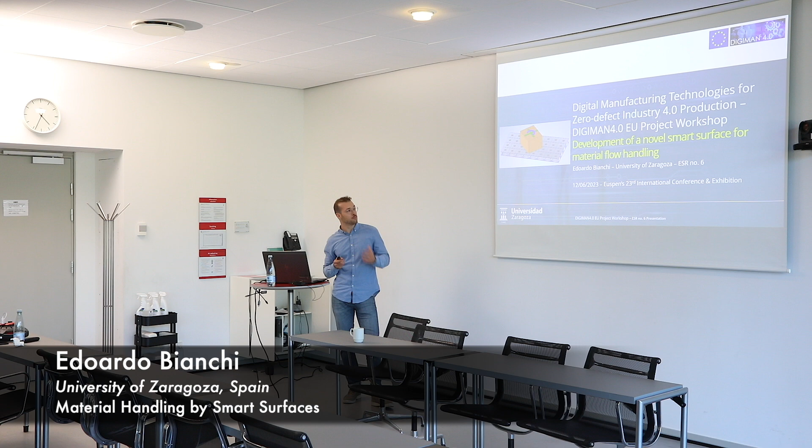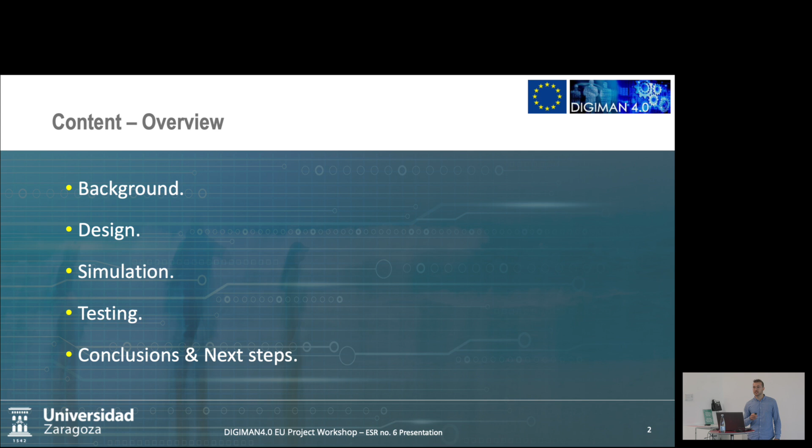Good afternoon, everyone. So, as Guido mentioned, the title of my work within the DIGIMAN project is the development of a novel smart surface for material flow handling. Today we are going to see the background introduction, the design, the simulation and the testing parts, and finally conclusion and next steps of the work.

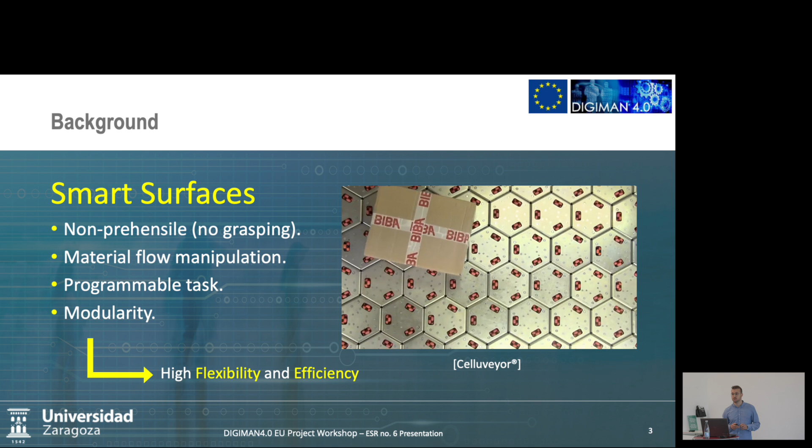Just a few words on what are smart surfaces. These are a kind of non-prehensile transport system used to manipulate and handle material flows inside factories and warehouses. And the main characteristics are that they are programmable and modular. And these two characteristics make them more flexible and efficient compared to classic systems such as conveyor belts or vibratory feeders. There are a lot of technologies that can be used to create these kinds of surfaces.

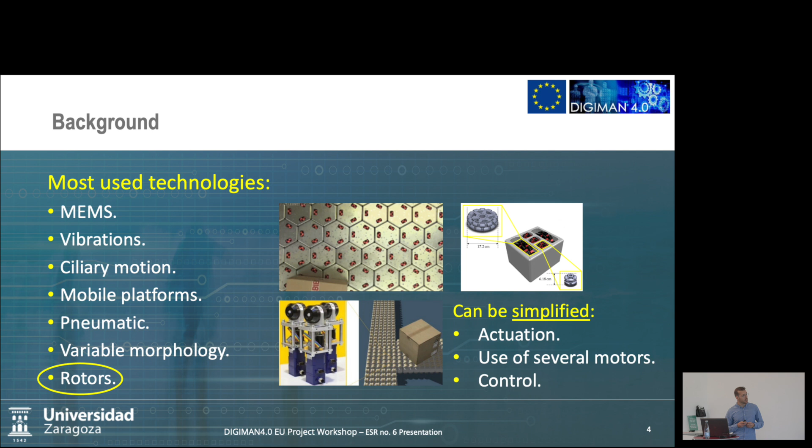I focus mainly on the last one of this list, so the surfaces with the rotors. And I noticed that this kind of system usually takes advantage of a lot of motors. So they exploit a lot of motors in each module, making really complex the actuation and the control. So I decided to work on the simplification of this fact, and I try to create a new surface without the use of motors.

So this is the concept of the surface. It's modular, like the previous system that I mentioned, but exploits idle rotors. So they are not actively driving the object on top of the surface, but I can control only the orientation of their axis of rotation. So the rotor doesn't have a motor inside, so it's not spinning, but I can control only its orientation. And this orientation can be placed only in a discrete number of positions.

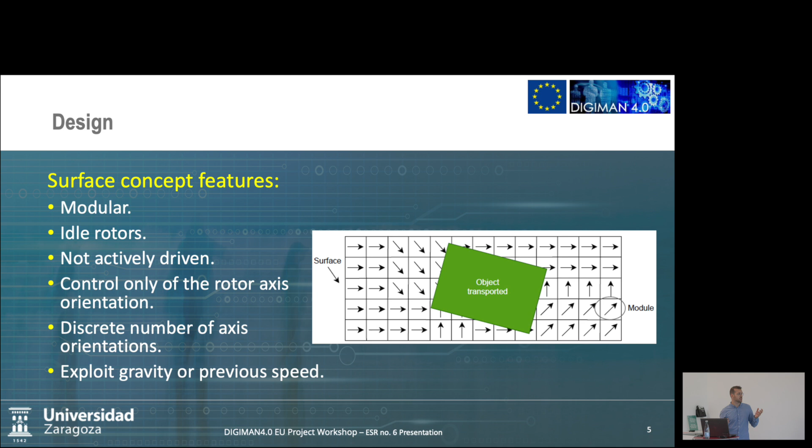So to compensate the missing actuation, since it uses idle rotors, I'm planning to use gravity, inclining the surface, or previous speed of the object. For example, in a transport line, you can imagine that there is a conveyor belt before the surface.

Focusing on the single module, the idea is to use a spherical rotor, which is supported from below to be free to rotate in every direction, and is surrounded by pins that I use to define the axis of rotation. So the idea is, when I want to define the axis of rotation, is to select a pair of opposite pins and put them in contact with the sphere. And this contact defines the axis of rotation. When I want to remove this axis and select a new one, I detach these pins and I connect a new pair.

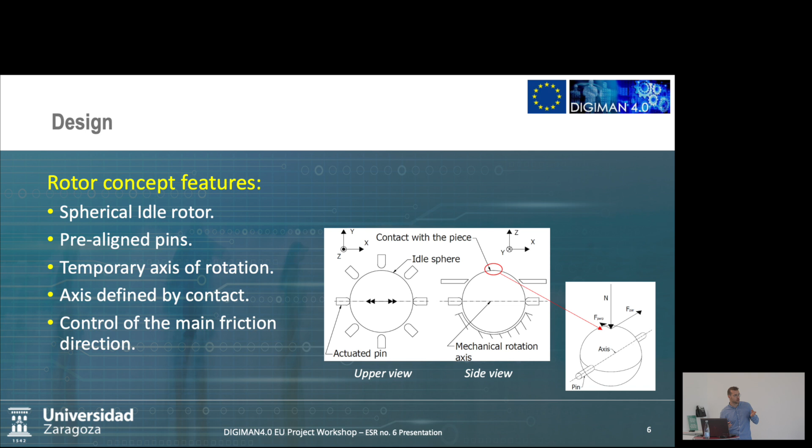And as you can imagine, when I have a rotor and its axis of rotation, there are two main forces between the rotor and an object that is moving on top of it in the contact plane. There is a force parallel to the rotor axis, which is the highest one because the rotor cannot rotate in this direction. And there is a smaller one, which is perpendicular to the rotor axis, because it's due only to the resistance against rotation of the rotor. And I'm planning to use these two in order to manipulate the material flow.

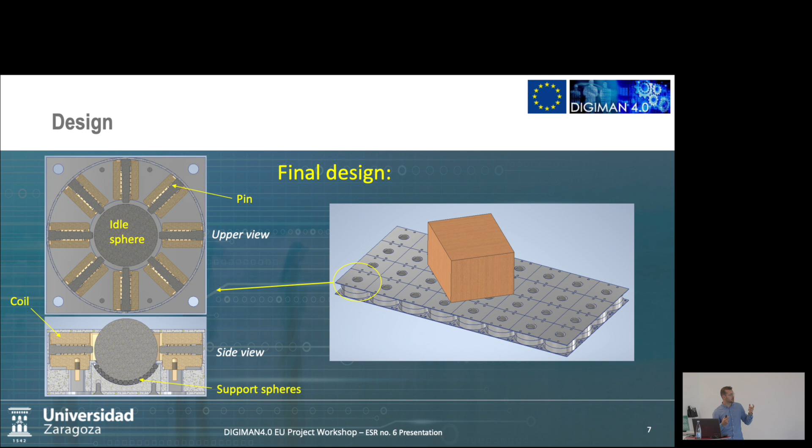This is the design which I came up with to do this task. So here you can see some sections of the concept of the module. So you can see the idle sphere in the center, supported by smaller spheres, and the pins surrounding the sphere, and the actuation system is done with coils. So the idea is to select a pair of opposite coils, turn them on, they magnetize the pins inside, and this magnetization produces the attraction towards the central sphere and the contact for the axis definition.

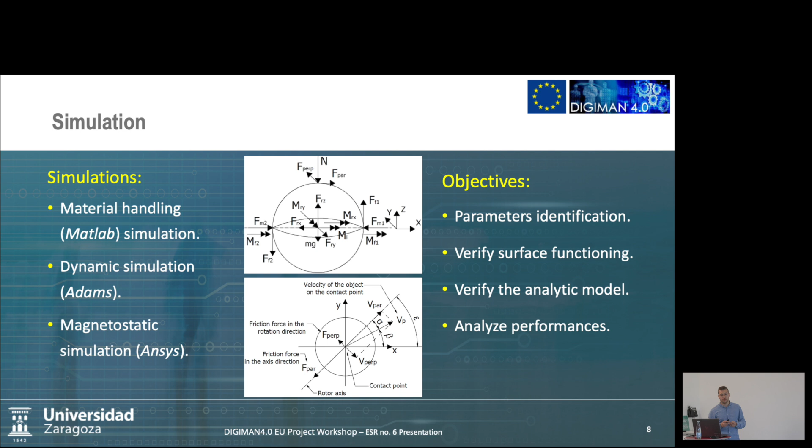Now moving to the simulation part, I've done three main simulations. One about the material handling with MATLAB, a dynamic simulation with Adams, and a magnetostatic simulation with ANSYS. And the objectives in this case were to verify the functioning of the surface, verify the analytic model proposed, and performances, and also identify some parameters.

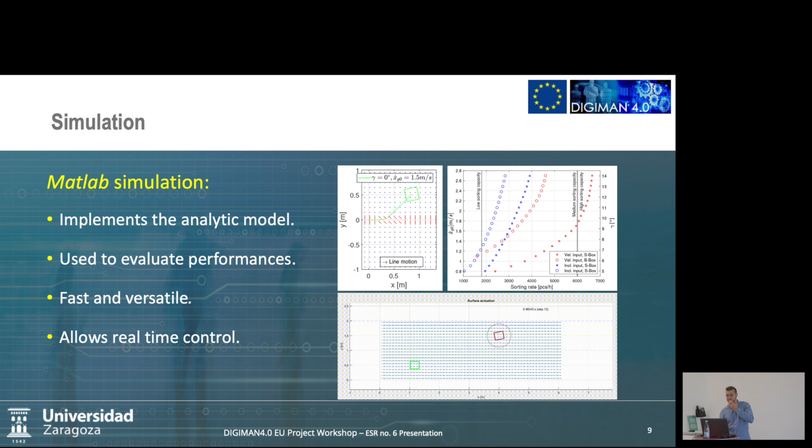In the other picture, you can see the sorting rate achieved with the surface, changing the initial input of the object, so the initial velocity of the object, or the inclination of the surface. And this MATLAB simulation is useful because you can test in a very fast way different kinds of situations, and it also allows the real-time control of the surface for the next step.

Then moving to the dynamic simulation, the idea in this case was to verify, with a dynamic model, if this concept of sphere and contact with the pins was actually working for creating these two handling forces. And I simulated a single module and the whole surface, which is the thing that I'm presenting here at Euspen with the poster, and see if this system is actually working for manipulating material, and also to evaluate the analytic model.

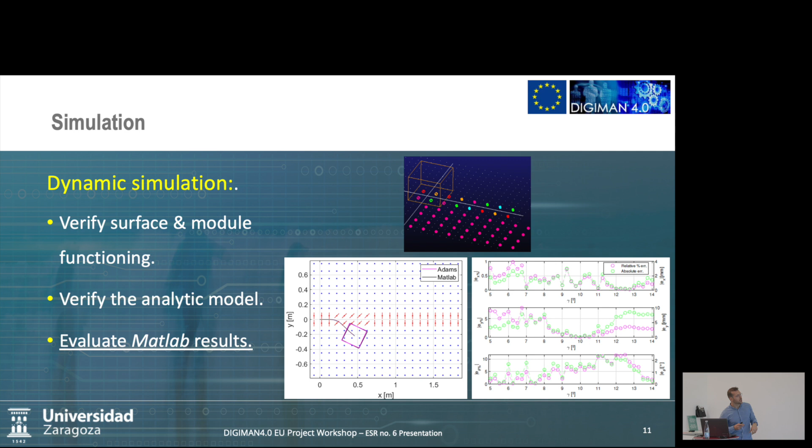Another use of the dynamic simulation was to evaluate the MATLAB results. So I've done the same sorting simulations with different inputs in MATLAB and in Adams, and I compared the two results to see the errors between the final position achieved with MATLAB and with Adams. For example, I've reported a graphical representation of this. You can see the magenta square and the black square are almost matching, and I've tested this for different inputs, and I've reported here some errors.

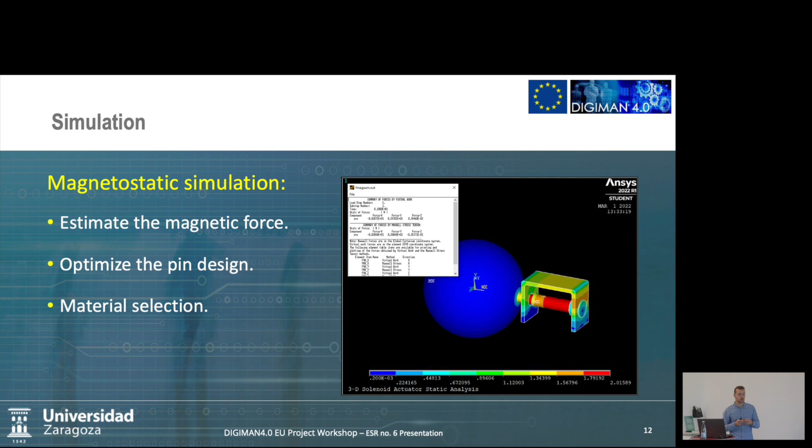The last simulation conducted was the magnetostatic one. The idea in this case was to estimate the magnetic force between the pin and the sphere, and I've used this in order to better define the shape of the pins, to increase this force, and to try different materials in order to select the best one.

After all these simulations, finally I decided to build a prototype in order to practically see if the system was working, to improve the design, to understand what can be improved or not. And I used this also to measure some important parameters like the friction coefficients and to validate the analytic models. I've designed 3 test benches.

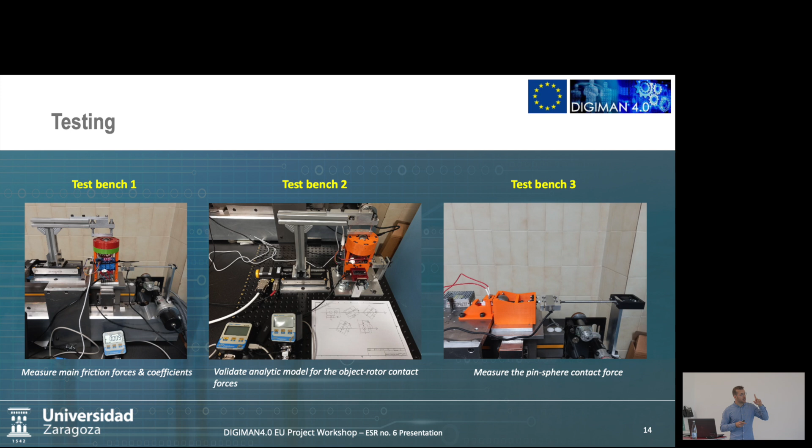And at this point, with the analytic model ready for the validation, I built the second test bench to measure the 2 friction forces at the same time with the object moving inclined compared to the axis of rotation of the sphere. This way, I've been able to compare the real measurement with the analytic model. And the last test bench was used to measure the magnetic contact force that I was mentioning before.

Here are some results, for example, some friction coefficients with different loads on the object, different materials in contact, so object and sphere. In the center, you can see the parallel force, the red one, and the perpendicular force, the blue one, obtained with the analytical model, the measurement with the second test bench, and the Adams software, changing the inclination between the object and the axis of the rotor.

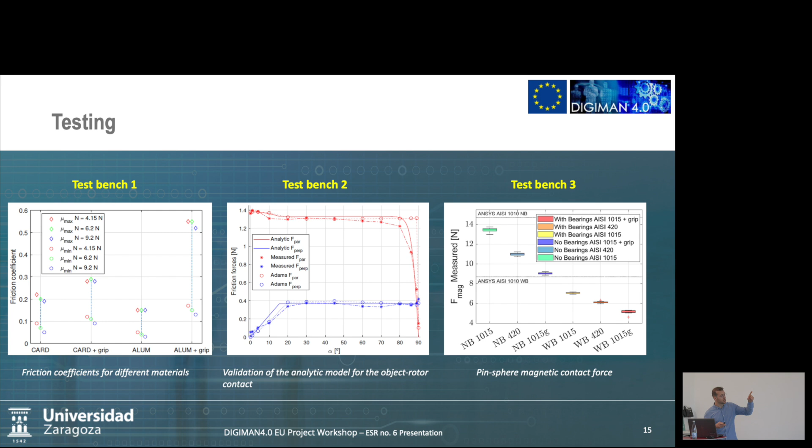And then in the last picture, there are some magnetic forces obtained with the last test bench, changing the shape of the pins and the materials in contact. And also the result with the software ANSYS.

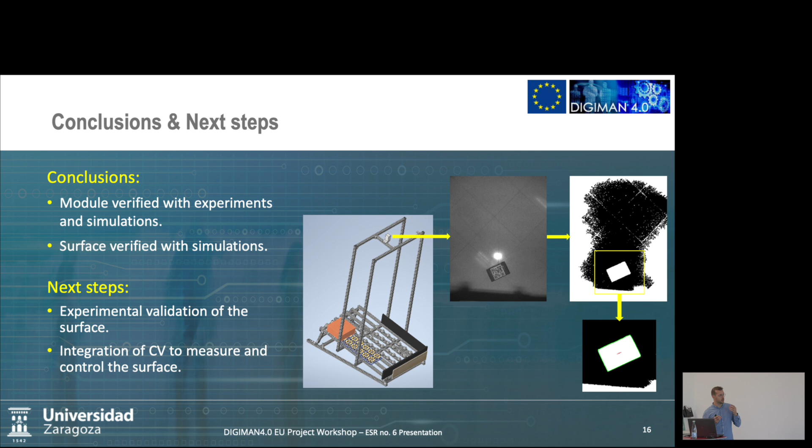Yeah, to conclude, what I presented was the design of a surface in order to simplify this class of system, this class of smart surfaces with rotors. And what I'm doing now is trying to build a small surface in order to include cameras and measure in real time the displacement of the object on the surface and verify experimentally all the simulations and all the tests done with one single module.